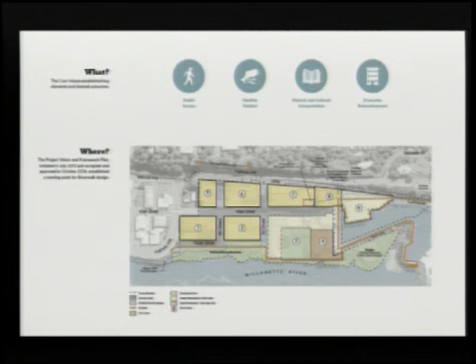And then, of course, the framework plan that was approved 2 years ago by this commission. We've been out in the community a whole lot this year. Starting in March, we held an open house at the Abernethy Center. Over 800 people showed up, and we were out at the First City celebration in July, and we got over 600 comments from that interaction, and talked to thousands of people that day. So in addition to all the meetings and community conversations I mentioned before, we've had these big events.

Alex will talk to you about the November 17th event we just held, but really what came out of these 2 events pictured here was the overall program of the Riverwalk and the key uses, which is on the next slide.

But first, the Tribal Advisory Board is also a way that we are gaining input from our tribal partners. There are 5 tribes that have historic and current ties to the falls. They harvest lamprey each summer, and the falls is a very culturally significant place. So we've formed with them a tribal advisory board that comes together and reviews Riverwalk plans.

That's an ongoing process, and we expect it will not keep pace with our timeline for Riverwalk design. So we're looking at a longer timeline with this group, which means we might end up with some unknowns when we have a preferred concept, with some gray areas that get later filled in once we come to an agreement with the tribal advisory board. So if we want to have space for tribal events or gathering or cultural interpretation...

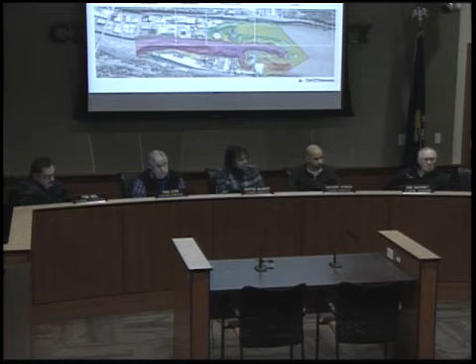We have wildlife sciences, CH2M Hill, and Stillwater Sciences on the team developing this information, and that segues nicely into this hydraulic modeling. CH2M developed this model of a 2-year flood condition. The deeper the purple color, the deeper the water is. Where you see a higher concentration of dark arrows, that indicates velocity or water speed.

Is that deep? The purpose of this is that we will be plugging the design scenarios into this base model to get an understanding of what would happen if, for example, we removed the clarifier. How would that affect flooding elsewhere on the site? So this is a 2-year base flood model, and we'll also be running a 100-year flood event model as well.

Can you do that by computer, make a computer model out of it? Yeah, that is a 100% digital terrain model, flood model. So the 2-year, are you referring to the last couple of years?

They just took the water flow? We've had some pretty heavy waters. We've been working with PGE to get their data, and a lot of their data is funneling into this design program. Definitely nothing like the 96 flood.

That was about 10 years ago. I'll show you, it's kind of faint on the screen, but there is a blue diagonal line that cuts through the site here, and that is the 96 flood line. Of those 22 acres, about half of the upland area is potentially inundated, marked by the blue dotted line.

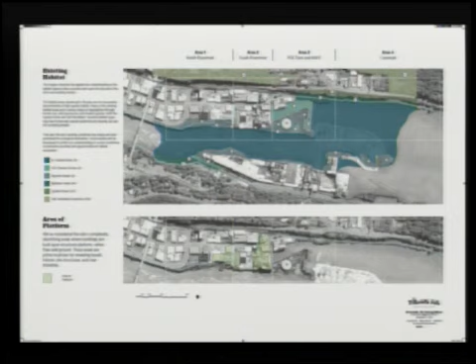These are the 6 habitat types we are working with on the project: riparian forest, upland forest, oak woodland and savanna, in-channel river, off-channel alcove, and riparian basalt. These images give you a typical scenario of what each habitat type would look like.

More technical investigations include public access. As Kelly had mentioned, we're looking at a TDM plan as part of this project, but also we want to acknowledge the different types of access onto the site, either by water or by land. How do pedestrian connections occur? How do vehicular connections occur? The water trail, if the locks aren't opened in the future, is there a good basis for providing a potential portage route around the falls? So we're looking at a lot of different ways, commercial access, everything really at this point is still on the table.

The bottom image is looking at key buildings for reuse. It's a small graphic, so I'll walk you through it. The red boxes in that diagram illustrate 5 key buildings to retain or remain, I guess there's 4 buildings, and then the one you can't see is the Woolen Mill Foundation. Everything else in orange is considered a secondary potential element, kind of an artifact worth retaining as well. The design team is still in the process of inventorying the site. As you can imagine, it's very complex, and there's a lot of building space to uncover and reveal. So this, again, is a working document.

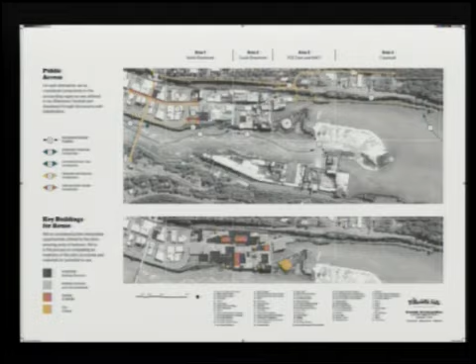While you've got the 5 tribes reviewing it, what about the State Historic Preservation Office? That's next. And the advisory committee? That will be next as well. We're expecting to hopefully receive comment and feedback from the tribes in January, so that process will happen next.

One of my questions is that it seems like this report is a bit delayed in my estimation, so why is it taking so long to do this when I thought they'd started earlier, way before we even started the process? It seems to me that some of the information in there, and the information available from the public, could be informing some of these maps, particularly when it comes to reuse.

That's a good point. Lori has basically created this, it's literally a chaptered book of information. She has gone through so many different sources and held interviews, and went through this very laborious process, and I think that's a lot of why it took so long to compile this information. There will be an academic review of this report as well, so there's just a lot of checking and fact-checking before it goes to the next phase.

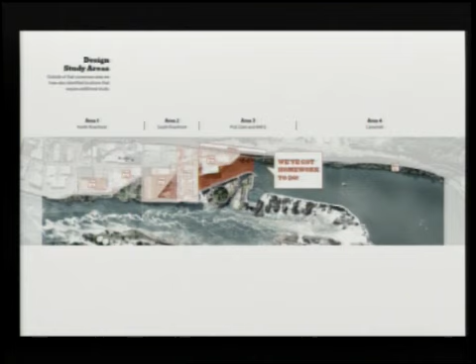Obviously we've got a lot of homework to do. We've identified in orange the locations that require further study, where public and private development intersect with each other, adjacent to that design baseline for the Riverwalk. With the design baseline, we've identified 6 areas or locations that required input from the public, and I'm going to walk you through each of those.

But first I wanted to give you a couple highlights from our November 17th meeting that we had at Clackamas Community College at the Gregory Forum.

We had an estimated 500 people attend the event, and an estimated 150 people participated in a workshop. How many of you were able—I was at the workshop the whole evening, so I wasn't able to—both of you guys? I was in Houston. Okay, well that's good, so we can walk through these design options. I was there in spirit.

In addition to the 500 people that participated, 89% of participants did not attend the March 30th event. We had 800 people at that event and 500 at this one, and 89% did not go to the first one. Seriously? Yeah, wow, that surprises me.

So we're reaching out to new people. That was a trend as well with the July event we had at the festival on Main Street. A lot of the folks I personally spoke to had not heard of the project before, and it was really interesting to talk with folks that... those were the people that were under the rocks.

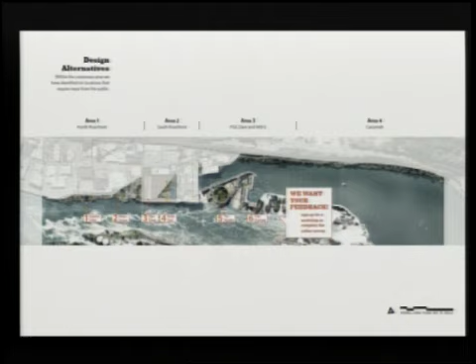I don't see any coverage on TV about this. Oh, I saw it on TV, they had this picture, it was on Channel 6. It was a good 5-minute segment. I saw it on Channel 2 and 6 - they said Willamette Falls, and I thought, I'm not going to change the channel now. It was also on OPB's State of Wonder. I heard that report and thought, why is Randy Gragg talking about this?

And one other number from the survey participants: 32% live in Oregon City with the zip code 97045. 10% live in West Linn, and the remaining participants live throughout the metro region.

That's a little bit of a false number though, because the Oregon City zip code area goes beyond Oregon City itself - you can be living in Redland and still have an Oregon City mailing address. That doesn't mean they live in Oregon City though. So you've got the core, and then you've got the outlying area. It'd be interesting to see how many people actually live in Oregon City as opposed to the outlying area.

Maybe we can ask that on the next survey. At the next survey, consider this, because I get a lot of people coming into my store asking where they can learn more about it. It would be interesting if we had a little business card - I know Laura gave out some big sheets and people didn't want those, but something small we could hand out to people to go take a look at the website.

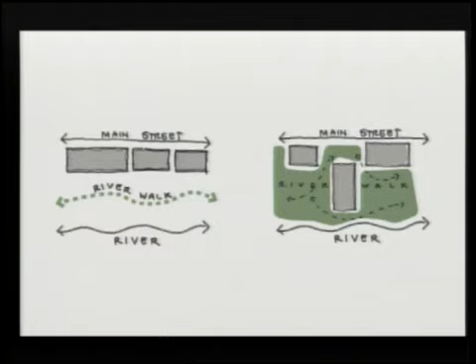This would be a typical scenario where your Riverwalk runs adjacent to your main street and the shoreline of the river, like in Astoria. But in this scenario, we want you to consider the Riverwalk jutting in and out of buildings, creating different pockets and spaces and making the site more active and dynamic, not just along the river's edge.

And then in this scenario, we're looking at the site as the Riverwalk just running in a straight line from point A to point B. But what we want people to really consider is that the site is very three-dimensional in nature, and how can we create a more dynamic experience that gets people down below the ground into these caverns of built-up industry below the platforms, or up high to create a different vantage point of the surrounding area. So we're trying to get everybody thinking about this site in a three-dimensional, dynamic way.

Well, you're going to have to take into consideration the condition of the river right now. How are you going to get people down close to the river right now? You might lose a few kids, or a mother-in-law, or what have you.

So there's a couple scenarios here, and this first one we're going to walk through is looking at explorer trails and how we can get people along the river's edge in a safe way that is more contained, not a free-for-all, given it's craggy, there's basalt rocks, there's sensitive habitat, and different cultural experiences we want to respect when creating access.

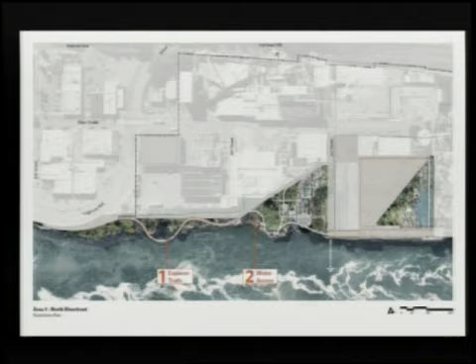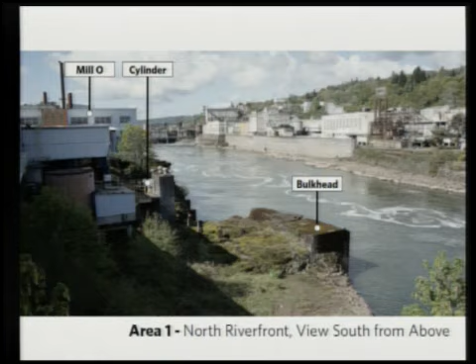Just to give you context on where we are, the bulkhead here will be shown in the plans, which I'll show you as we move into the design. Mill O is in the background, and there's a cylinder that could be used as a potential touchdown point for some of these trails. A lot of these site industrial artifacts or remnants remain because the design is considering using existing structure instead of ripping out and putting in new, so that's why certain areas are retained in these options.

Well, it makes a lot of sense. The less in-water work we have to do, the better for the project, and it isn't held up because we're waiting for stream flows and all of that stuff. And again, as you've said all along, this is going to be a fairly sustainable project, so adaptive reuse of things is awesome.

I was particularly interested in the one you just showed. I guess I've never really seen a topo of the river itself, and where it drops off is quite substantial. That's the actual bathymetry of the river, and it gets pretty deep and narrow through that section.

It's interesting because even at low water you wouldn't be able to see anything like that, but I was very curious about the depth in that river channel, because sometimes when larger boats come up there's only a certain place they can get to before they have problems. I have a 15-foot boat and I've tried to get up there and hit rocks coming up from underneath the water, closer to the falls. I never realized it was that deep in there.

I had no idea. Do you know what the depth is there? It's about 100 feet. According to your topo, it's 100 feet. That's deep, a lot deeper than I thought it was.

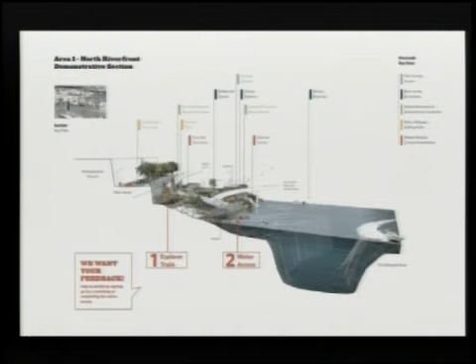In this scenario, we're looking at a proposal for non-motorized watercraft to launch in what looks like a stepped, tiered gathering area spot shown here in white. That would not be a boat ramp type of scenario, more like Hood River Park, where there are steps that get you down to the river, but it's not a formal kind of boat launch. The next scenario looks at not providing any water access at all, but using that as an opportunity to restore the existing habitat along the river's edge.

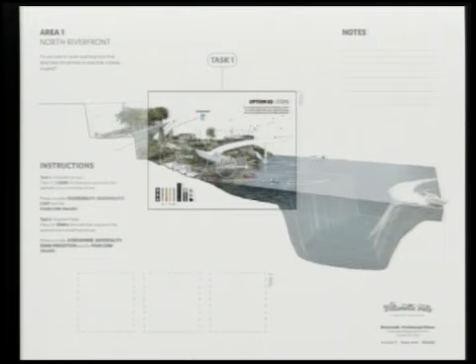That was the gathering area we looked at. The last option looks at a potential dock, which could either accommodate non-motorized watercraft, or could be a potential to accommodate commercial or motorized watercraft. In the workshops we had, there was a lot of great conversation about whether we want commercial access, or maybe not, because there could be a potential conflict with fishing. So there was a really nice conversation focused around the boat dock.

As a commercial use, like the Spirit of Portland or Portland Spirit, have they indicated any interest? We are talking with Portland Spirit as well as the Willamette Jet Boat folks. They will actually be at our stakeholder meeting on Wednesday, so there is interest there.

If they don't necessarily need to go there, we have our other dock that could handle what they have, so it's not like they have nowhere to go. They can come into John Storm Dock right now, and that seems like a better alternative, because then you have a place where people could stage near Clackamette Park. They could be shuttled down to the Legacy Project area and back and forth, so the one that's there could be much better for non-motorized vehicles.

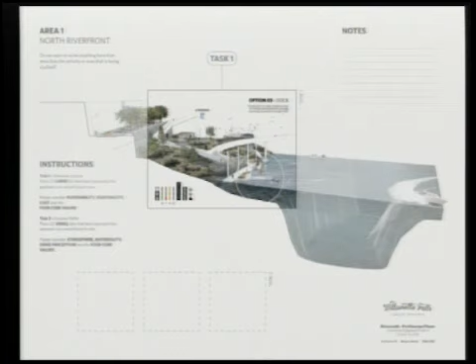Okay, moving on to the South Riverfront. This one is looking specifically at the pipe chase, or the old pipe tunnel, and the public yard. I'll talk about the pipe chase first for consideration.

Well, this is the one I sat on. The pipe chase - we'll show you an existing photo here in a second - is approximately 24 feet wide by about 300 feet long and about 24 feet tall. I thought this one had an existing photo, but I guess we didn't put it in there. Sorry about that.

Essentially, this pipe tunnel is a big square rectangular box that creates a very strong hardened edge along the river. We're looking at different opportunities - if this isn't used for stormwater management in the future, how can we re-envision it to help create a more contiguous habitat area? How could we address potential pedestrian connectivity, or address potential views from inside the site as well as views from the river into the site?

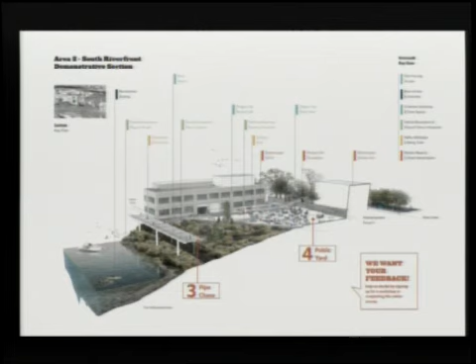In this option, we're looking at deconstructing a portion of the walls on the pipe chase. Not necessarily shortening it by its length, but cutting out or carving out little windows to create a porch-like environment, a covered space from the sun and rain. In community conversations at the event, that was a strong reason for keeping an option like this on the table. This option also allows pedestrian connectivity along the top deck portion of the porch.

The next option is looking at deconstructing it to create more of a bridge type scenario. This could help with habitat, where deconstructing the bottom portion could enhance habitat underneath the pipe chase, while still allowing pedestrian connectivity along the river's edge at this point.

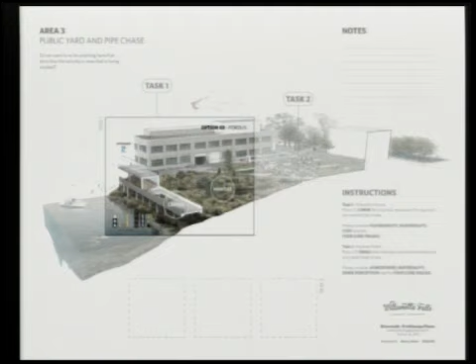The next option is a hybrid between those two. Maybe there's a way to create a smaller porch-like situation with a portion of the pipe chase, but then open up and create more transparency down to the river's edge.

In that one, you see the cutout in the walkway. One reason behind that is to allow light to pass through to get down to the water, because fish actually won't swim into dark areas since there might be predators there. If you allow that light to shine through, the fish will be more willing to go into that space.

Does the pipe chase actually extend directly to the point in front of Mill-O, or where does it terminate? Is the pipe chase in front of Mill-O as well as in front of the yard? Yes, it starts at the corner of Mill-O, at the north corner, and it's connected in part to Mill-O along its foundation there, and then it extends farther south down to almost the boiler plant area.

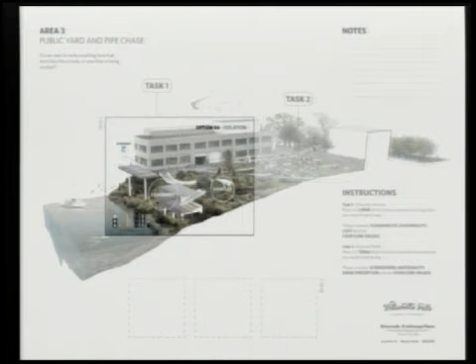This scenario is an option that makes a larger gesture at removing fragmented habitat from the water's edge into the upland area, addressing what we're calling isolation or a fragmented approach. It has a top deck scenario paired with maybe a smaller structure that is separated from the main path of travel.

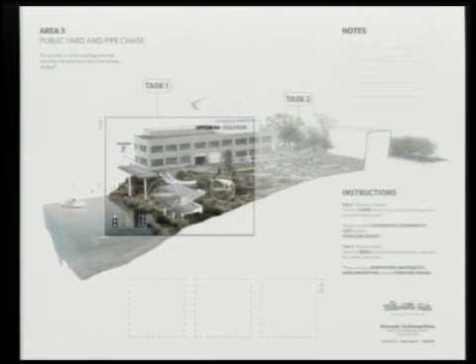Is that two different levels, the portal and then the fragment down there? I'm thinking of photographers, who could get a different picture up above than they can down below, or they're trying to create different things. It's not been fully baked yet at this point. As far as whether we have people up on the roof of that fragmented structure, a lot of that is still a design consideration we're looking for.

Normally the base of the pipe chase is the lower level, and that's the higher level. In this scenario, this is the upper level of the pipe chase, and the lower level would be what you see underneath, supported on stilts. There would be some alternate pathway for wheelchairs or other people to get down to that level.

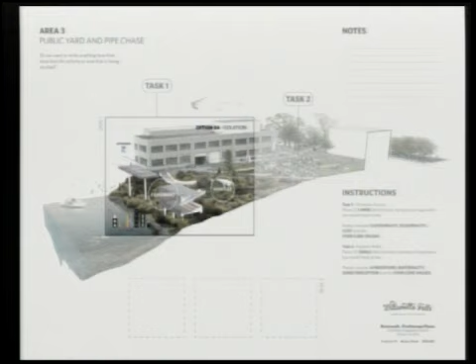How wide is that easement? It's 120 feet from the river's edge, but we have property rights in. Where is it the most narrow? It is 120 feet basically if you take the shoreline around. So we're taking advantage of the entire easement, and then some. It's a preliminary easement, and once we have a final Riverwalk design, we will finalize the easement area, and that could change, getting narrower in some places and bigger in others.

The last option here is looking at just retaining a very small portion of the pipe chase for a covered viewing area, but really opening it up for habitat enhancement and protection in this zone. One thing that does is allow better views of the river with that pipe chase removed if you're in the public yard area.

But people wouldn't be allowed to walk in there to trample the natural wildlife, right? Right, there would need to be some balance of access versus habitat protection, because the pipe chase currently fragments this upland area from the river's edge. As you remove portions of the pipe chase, the more continuous habitat you create, the more the habitat value increases.

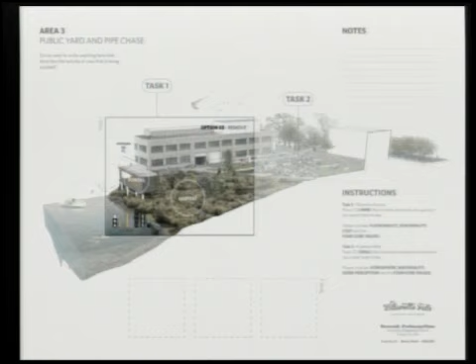I was wondering about this too, because I sat in with Laura on the one about this pipe chase, and I was trying to think, what's going to be the final determination? It's not going to be a vote of the people, obviously. Is it the planning commission makes a suggestion based on what we're hearing from the tribes and everybody else, and then it goes to the city commission? Or is there going to be a wider group that makes the final decision of what this would look like? Obviously we can't have the whole public vote on it.

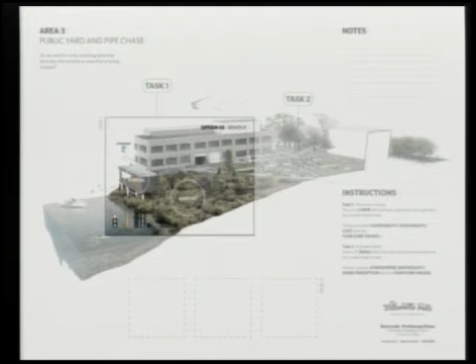As Kelly mentioned earlier this evening, we have a partners group made up of elected officials from each of the 4 partners: Oregon City, Metro, Clackamas County, and the state of Oregon. Together, collectively, that's a consensus-based model as far as how decisions will be made, and we will be making recommendations to the partners group.

So they're making the final decision. We go over this plan, pass it to the city commission next, they go over it, and then they tell that group what we prefer for Oregon City.

The way the project has been moving currently is before we make a presentation to the partners group, like Metro Council for example, they actually had a work session focused around a specific element of the project that helps inform the 2 elected officials that sit on the partners group.

Does any group outweigh the other? Like Oregon City, since it's right here with us, do we have more say in the decision? Are we equal with Metro? It's all based on consensus.

We have a lot of staff working on this and a lot of public engagement. We're really trying to balance all the technical information we're gathering with our consultants with all the public engagement, and direction from the different partner agencies like Metro Council and Oregon City Commission, trying to find that right balance and bring it all together.

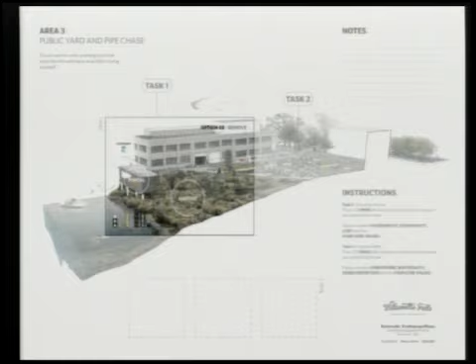And the partners group decision is made by consensus. A lot of what we hear, I think, is because the partners realize it's in Oregon City. So a lot of what we hear at those meetings is people saying, I'm going to defer to Oregon City on that one, because if it's about the public yard for example, the details are a lot more important to Oregon City than to the state of Oregon. So absolutely, we're all kind of thinking in that way.

I didn't mean to interrupt, Bob. That's all right. One of the details though is how much this thing's gonna cost. That was my next thought. Point A, point B, and we go with point B, but that's too expensive, so by default we gotta go back to point A, and we just have to change our mind in the middle of the stream.

Wouldn't it be more effective to say, look folks, here are the problems we're confronted with, and here's some of the solutions. However, it's gonna cost you $4 or $5 million more with this than with that. So, when does that decision get made?

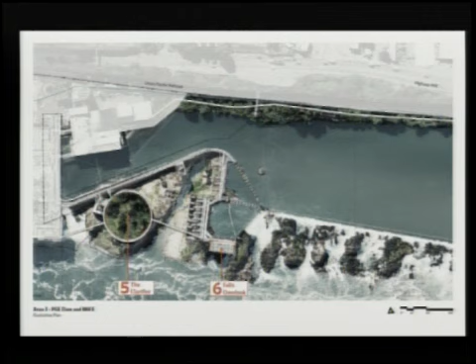So you see a couple different over-water structures here. Those are intended to be secondary connectors. For example, if PGE is doing maintenance on their dam and needs to close it off for public safety, this could be an alternate route where the public could still get out to the viewpoint to see the falls, while PGE maintains their operations. We wanted to throw that out there as something we're considering as we move forward.

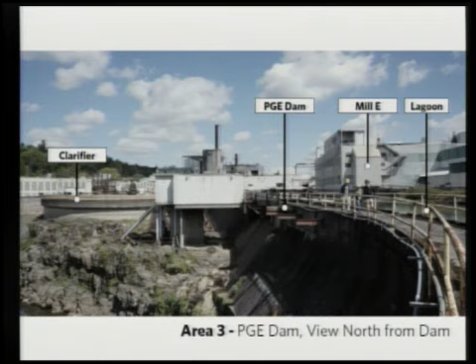Here is an existing photo, the clarifier here on the edge of the river. Here's the PGE Dam, and beyond that guardrail is the intake basin, or the lagoon. And here's another shot from the opposite side looking at the clarifier. You can see how it's perched up on a lot of that old basalt.

Believe it or not, we did a rare plant survey a couple years ago when the site went into bankruptcy, and in this location a lot of rare plant species were actually identified. This is one of the priority habitat areas for potential restoration.

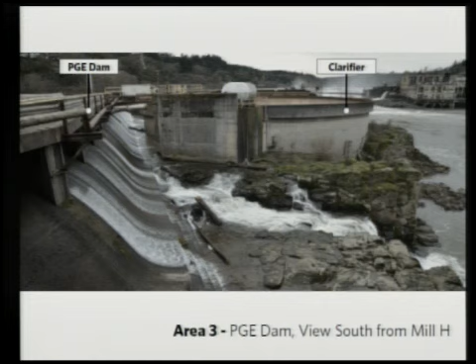Adjacent to it or in it? In the basalt, not the clarifier. Between the crevices, yeah. What went into bankruptcy? The site, the mill. Oh, okay, because you said it went into bankruptcy, I was like, what? Oh, sorry, that's okay. We just thought something new had gone into bankruptcy. Thank you, Bob, I wasn't the only one confused. Wow, that caught my breath. We haven't even started construction and we're already in bankruptcy? No, we're not there yet.

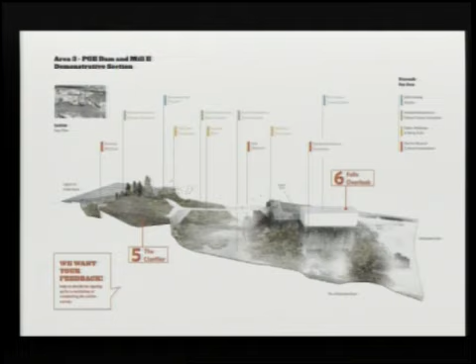The area for design consideration, which had alternatives proposed, is the clarifier, which is that circle in the center. The first option that was up for consideration, and still is, is removal of the clarifier for habitat creation, leaving a remnant wall as a nod to its industrial character, but really taking out that structure in entirety and preserving the area for habitat.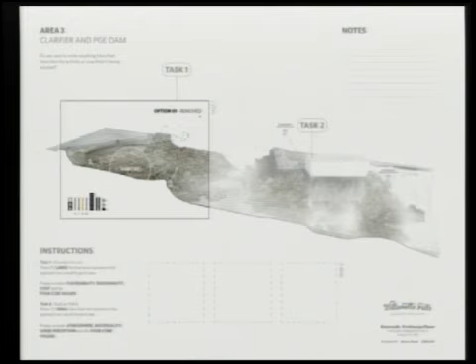The next option looks at keeping the clarifier intact and actually retrofitting it so that we could create something like a theater in the round, where this could be a smaller event gathering space.

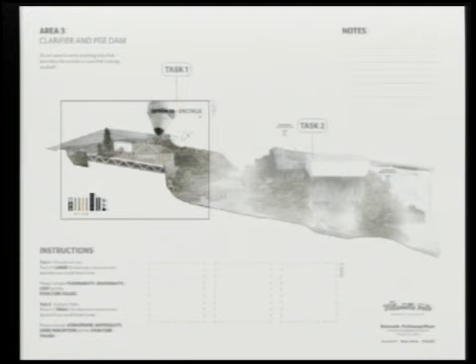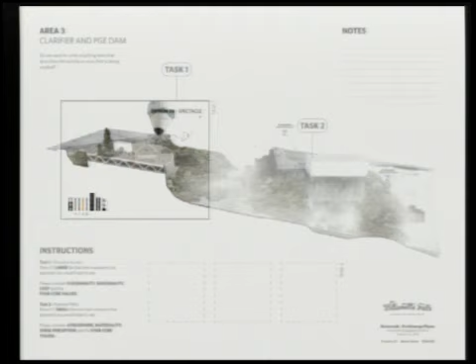The next option is looking at building up maybe an elevated deck on top of the clarifier, and in this option, looking at ways to create a temporal attraction. For example, a hot air balloon is a non-permanent solution to create views that could take you up to look at the watershed and the context of the site in relationship to West Linn and the river. But this is just one idea of how that attraction could be created. Would that be tethered? Yeah.

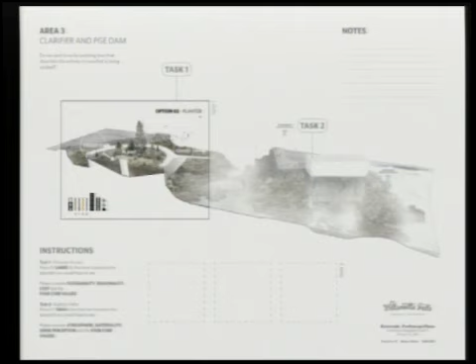The next option is looking at keeping the clarifier intact again, but actually filling it with soil to create a planter, a botanical garden of sorts for wild plants, for habitat. By keeping the clarifier intact, there's also an opportunity to maybe create a walkway that goes around the perimeter of it as a potential secondary connection, like I mentioned.

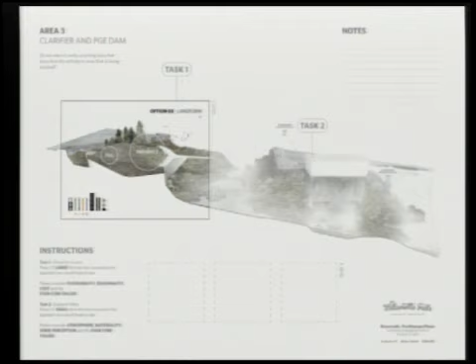In the next option, it's similar, but creating more of an earthen landform, which is again an opportunity for habitat, but maybe on the side facing the river, being able to elevate you a little bit higher. This could be a nice relaxing spot where you could lay in the grass and get a different perspective of the river.

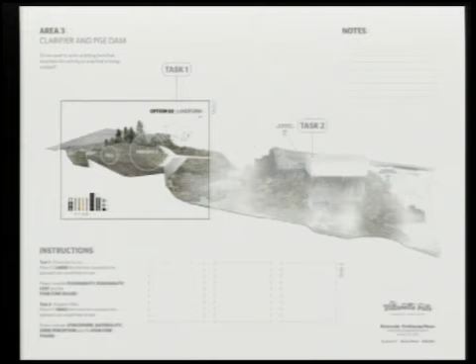That looks like it'd be cheaper than the theater in the round and all that other stuff. Yeah. And we got it.

The area we are looking at for consideration of materiality and experience is the Hawley Powerhouse Foundation. What does that overlook of the falls feel like, look like? Do you want to see concrete, or something more like wood or stone? Should it be covered? Should it be a space for solitude, or a space where groups can gather? Those are a lot of the questions we were asking people at the workshops to help us with.

Looks like Norway. Are there any questions on the South River or the PGE Dam and Mill E area?

You're pretty solid on the area for a large crowd to gather though, aren't you? At the public yard? Yeah, that's one area. The second area for consideration is a smaller group at the clarifier, for example. Those were the two areas identified for gathering or event space.

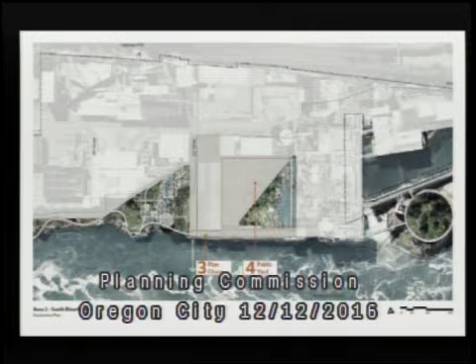First of all, do you see where the circular—what do you call that thing—the cylinder. Okay, now the square outline just above that. This here? Yeah, that outline is number 3 paper machine. Number 3 paper machine is eligible for the National Register of Historic Places.

This graphic shows number 3 paper machine removed, for example, for the purposes of exposing that tail race and adding more enhancements to the natural part of the four key values.

One issue is that it's shown as a flowing stream, but that tail race was never an actual stream. It was the discharge of a flume that powered the flouring mill there, which is kind of bisected by that diagonal walkway, a little higher up—here, yeah—and going towards third.

That is number 2 paper machine right there, the foundation. And I think what's being shown there is at the tip of the triangle, where the historic foundation of the flouring mill is. I think the intent is to show the historic foundation being exposed for public view as part of the Riverwalk, which I'm all for—that's a great thing.

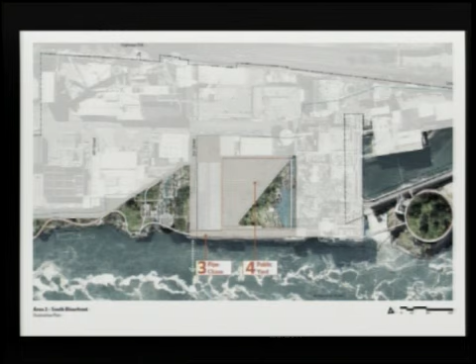Okay, anything else? Thank you. No, thank you, it was good going through all that with us. I won't feel so bad about having to miss part of the meeting tomorrow now, because I'm going to be at the alternative mobility thing. Thanks for your comments, we'll be back with more information, thanks for bearing with us. This is the fun stuff.